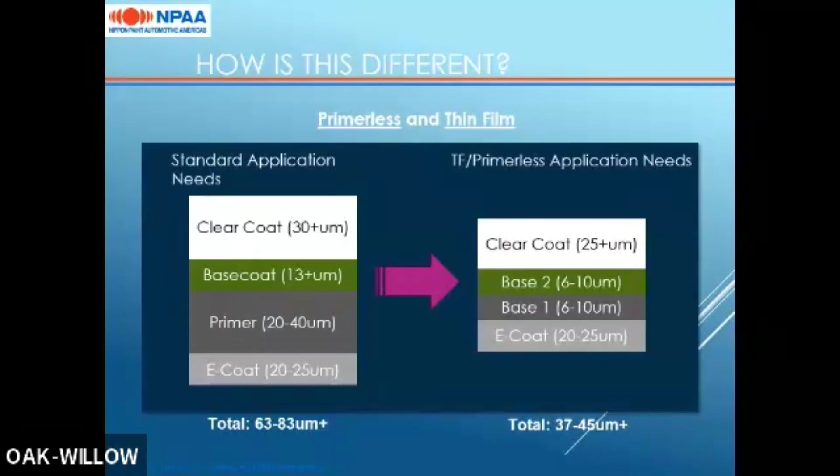There is some variation for colors that traditionally have poor hiding, such as whites, where film builds are higher. So the additional benefit there comes from the compact line design for this coating.

For standard conventional 3-coat 2-bake and traditional 3-wet processes, we still have the full bake or high temperature flash off oven between primer and base coat. Then high temperature flash off after base coat, clear coat, and then full bake after clear coat.

With this process, we are able to eliminate that first oven after primer to give us the compact process of base 1, then base 2, high temperature flash off, clear coat with full bake.

Overall, this allows for plant footprint and capital expenditure being reduced by up to 30%, depending on whether this is a new line being built or adaptation of an existing line.

So why do we use primers? Why is it a big deal that we got rid of them? Primarily, they are used for light protection, so they help block visible and UV light from degrading the E-coat layer, which helps protect the steel. This is achieved through a combination of film build and high hiding power.

As you can see in this graphic, most coatings, again, being derived of the primer, base coat, and clear coat layer, the clear coat provides protection against the UVs with UV additives and HALS. The base coats then also block some light and UV, but it's very dependent on the pigment selection. So a lot of reds, whites won't protect as well, whereas the primer helps protect against all the rest of any light penetration down to protect the E-coat entirely.

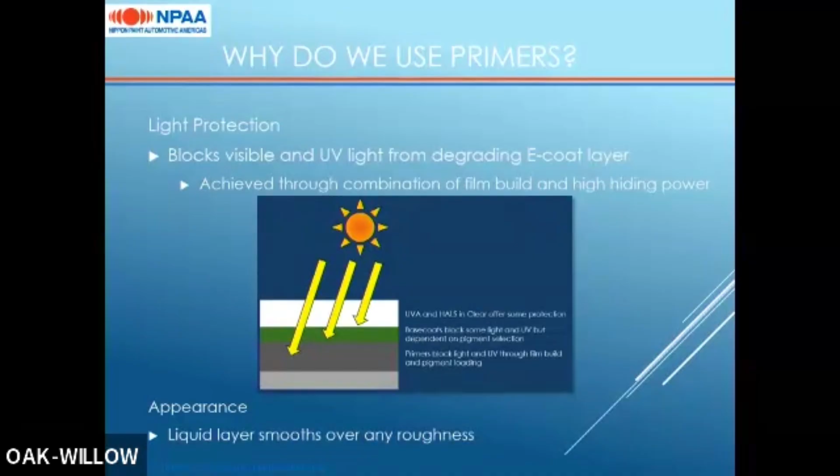Primers also help improve appearance. They cover up any defects in the E-coat layer and anything that needed to be repaired before top coat is applied.

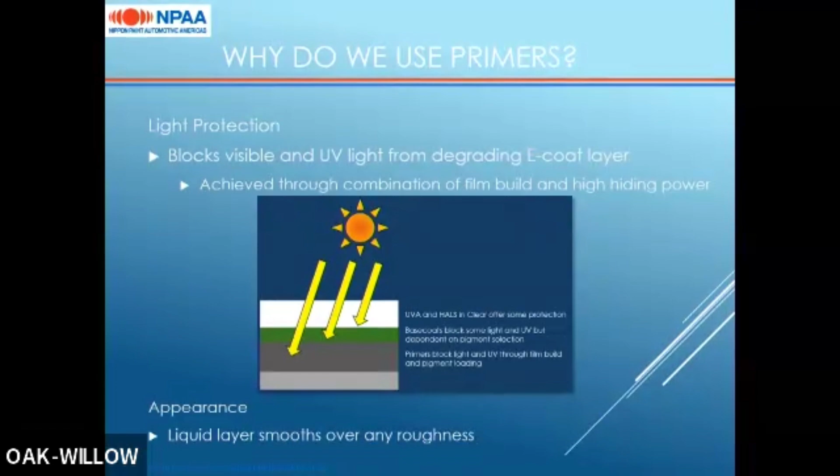Additionally, primers help with chipping resistance. They balance soft and hard properties to disperse energy. So in general, they need to be soft enough to prevent impact damage, but hard enough to prevent easy scratching.

In this infographic, we have the impact coming down and hitting your coated surface. If your film is too hard, then that energy is dispersed in the direction of energy impact, which then allows for deep defects to occur all the way down to the E-coat or steel layer.

Whereas if your film is soft, ideally optimized, that energy is then dispersed along the surface, so it just creates a small scuff, and your E-coat steel surface stays well protected.

So what are some of the benefits of eliminating the E-coat primer?

The downsides of primers, typically they require high film build. This creates risks, particularly for popping, sag. They require HFO or full bake before base coat, which is a high energy use. They also are difficult and costly to adapt for unique color positions, at least in my experience.

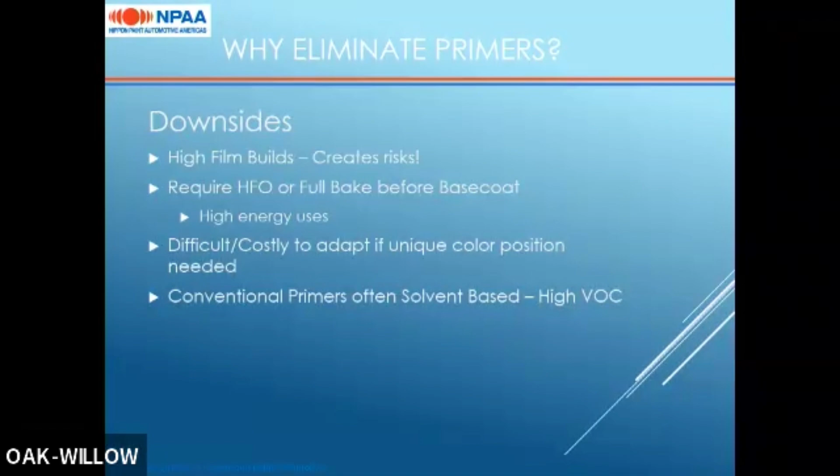Additionally, conventional primers are often solvent-based, which is high VOC. This system is water-based for both base coat layers, which helps reduce VOCs.

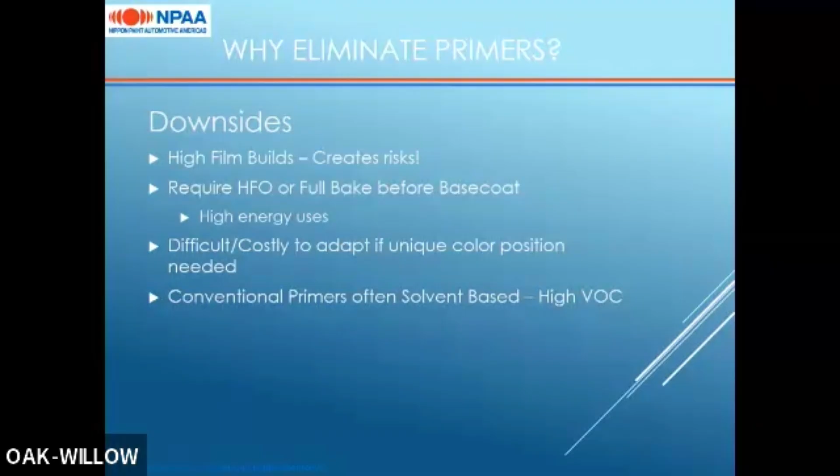So how does this technology of thin film primerless help address these needs? So for chipping, we use magnesium silicate body pigment, or talc, which is commonly used in most coatings. It is optimized for this technology to provide soft barrier to absorb impacts, and it's incorporated into both the basecoat 1 and basecoat 2 layers.

Just as an example, if you have a system without any talc, I'm sure all of us who design paint coatings know the risks, but it will allow impacts to occur that causes damage all the way down through the coating layers.

With the talc level optimized, it creates a good coating that prevents delamination below the base coat. So while there may still be coating loss, the coating loss will typically be within the top coat layer itself, so there's still adhesion to the substrate, which protects the underlying surfaces.

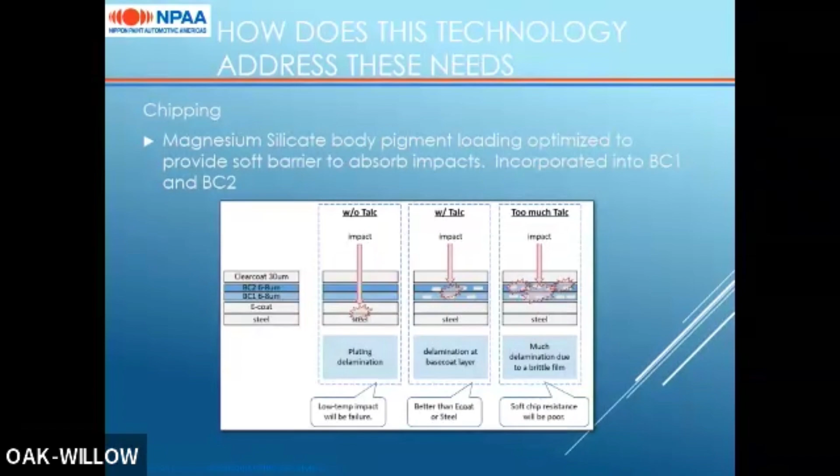If there's too much talc in your coating, then it causes delamination as well, as it breaks and interrupts the resin too much.

Additionally, these coatings are designed with a higher level of polyurethane dispersion. Again, this is pretty common in most existing coatings, but it has been optimized for this, and the type and amount are used as a replacement for more brittle resins that are typically used in a base coat, such as acrylics.

So just as an example, this is a very general version of a polyurethane made up of rigid sections and flexible sections, which then allows the coating to bend and return to its proper surface when impacts occur, so it can flexibilize.

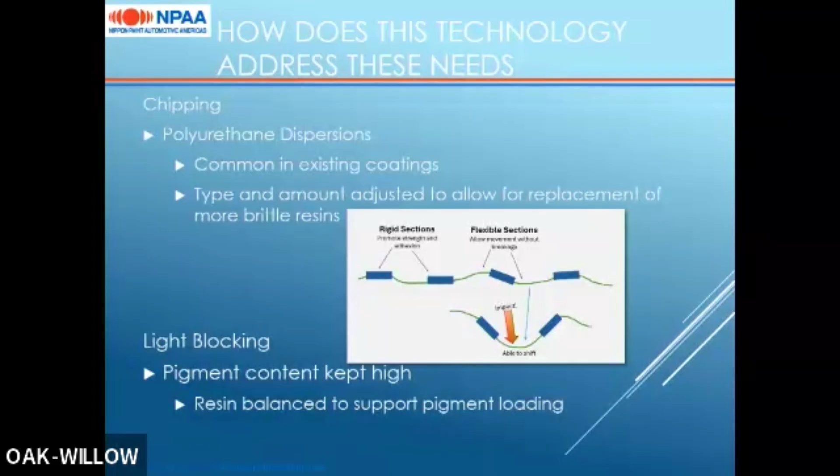Additionally, these coatings are designed to help with light blocking by ensuring that they have high pigment content, and the resins are balanced to ensure that pigment content is able to be maintained without any downsides.

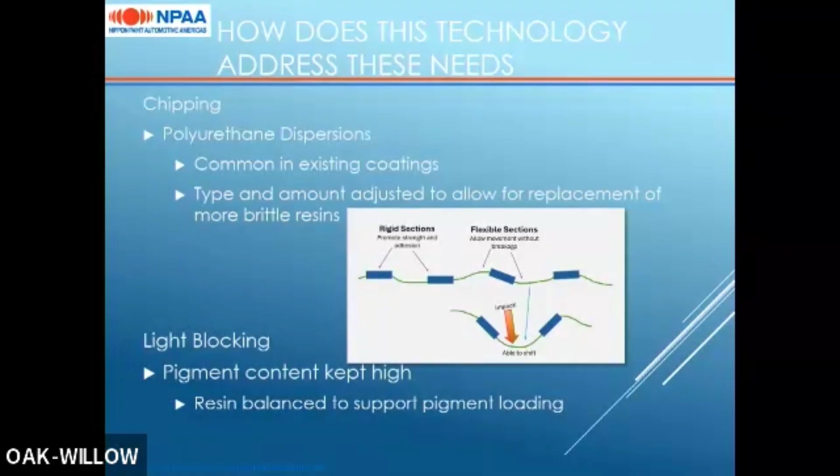Just as an example of some standard layering, for most standard colors, so not your premium colors, not whites, they use a film build of 6 to 8 microns for each base coat layer, with white and poor hiding colors typically being higher than that. For example, one of the whites that we have developed in this technology uses a base coat 1 film build of about 32 microns.

So that kind of doesn't help with the thin film portion, but because of the consolidated application process, there's still a lot of cost benefit to that. But all of them are designed to optimize the light protection.

A key benefit of this as well is that due to the dual base coat layering, unique and premium colors can be tailored by adjusting the base 1 and base 2s. Just in this little example here, we have one common base 1 in this kind of magenta color, but then we can use 2 different base coat 2s to achieve 2 different color positions. This is just an example.

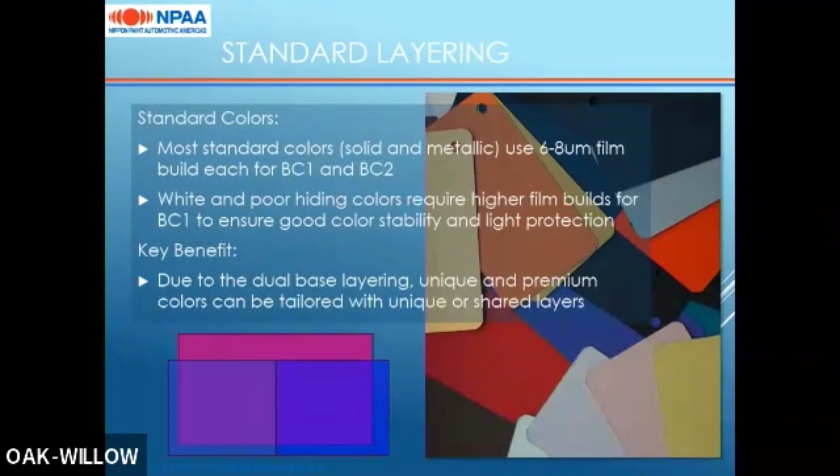Then for e-coat considerations, one of the things I've mentioned multiple times during this presentation is that most current colors or coatings are designed to help protect the e-coat. So for this, we recommend the use of specific types.

Most standard e-coats are sensitive to delamination with marginal hiding top coat systems. If the e-coat is overbaked or turns green or brown from that overbake process, it does make them more sensitive. In this example here, I just have what a typical not overbaked e-coat should look like and what a slightly overbaked e-coat should look like.

Standard e-coats can also be exposed to and are sensitive to the visible portion of the light spectrum past where most UVAs would protect.

We recommend e-coat that's been designed for compact top coat. The one that we provide is formulated to reduce oven oxidation. It's more forgiving at a low bake window, minimizes overbake e-coat yellowing, and there's space within its current design to optimize for further durability if needed.

All of these combined help reduce the risk of chemical breakdown, leading to delamination when exposed to UV or high energy visible light. So while our top coat is designed to prevent light penetration to the e-coat layer, the additional protection from the e-coat helps prevent damage to the substrate.

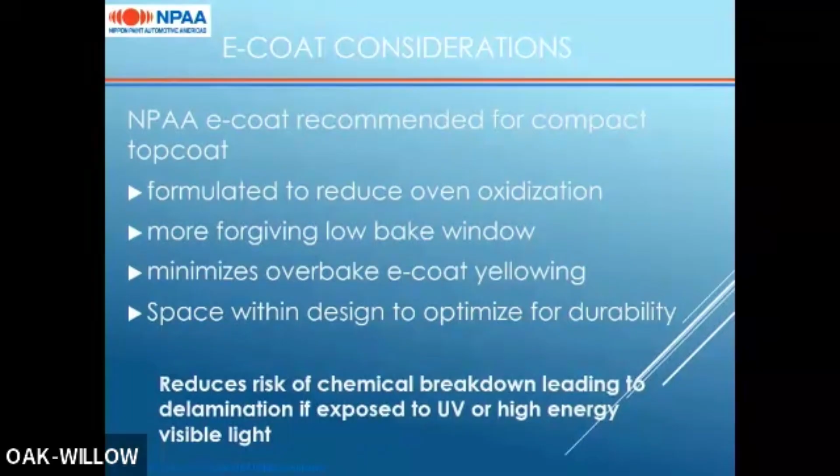Then just information on the base coats themselves. So base coat 1 is designed with high pigment concentration, again for that light protection. It has a high loading of polyurethane dispersion. It can be made with and without effect pigments, depending on what the desired finished color position is intended to be. It also is designed to be more hydrophobic, so even though it is a waterborne coating, it's designed to be hydrophobic primarily to ensure good compatibility with base 2 without them blending into each other.

Then base 2 is designed for high pigment concentration. It has also a higher PUD level than a standard coating, but lower than the base 1. Typically contains effect pigments and UV additives.

Then both of them are designed with the NV and viscosity or rheology optimized to allow for good appearance, particularly in areas where there's overdusting, so along interiors, crossover sections, and as well as to prevent sag and pop at high film build areas.

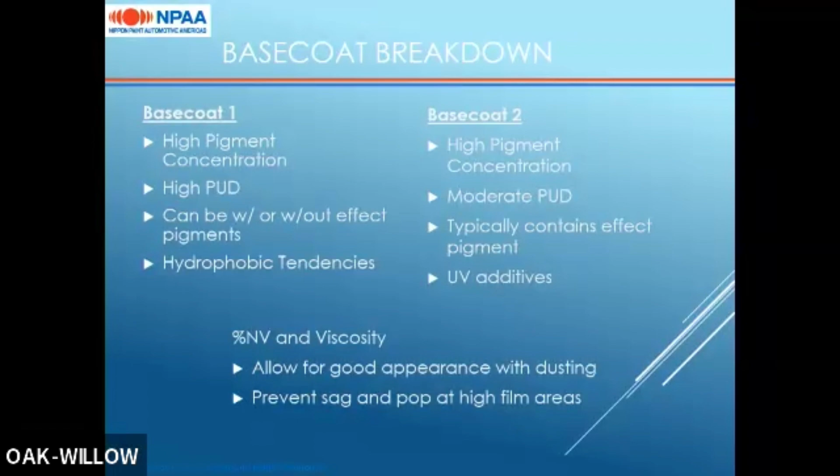And then the clear coat that we have for this system is a 2K polyurethane clear. Since this is a thin film build technology, 2K is generally the best way to go forward because it's going to offer better durability than a 1K clear coat. This improves performance with isocyanate migration. It's also higher durability than a 1K, as I said.

In the technology, in the clear coat we have, we use a similar isocyanate to the one pictured here.

This is just an example, combined with an acrylic resin that is designed for a shorter branch chain. This creates a tighter cross-link structure, which is more durable than a longer branch, which is typically used more for polishability performance.

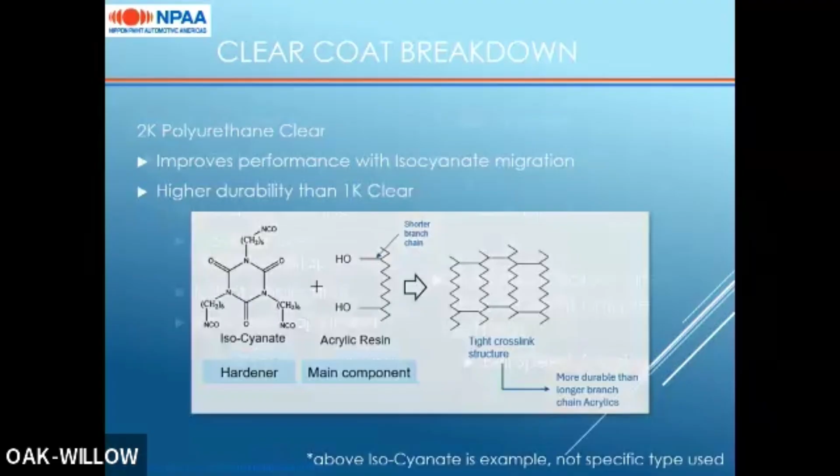So implementation considerations: film consistency, which we know we get at the customers that currently purchase the technology. This is controlled through paint properties and application settings, again optimizing that overdust and overlap area on the vehicle.

It's also very important that you use robot application. Given that this is thin film, using hand spray makes it very difficult to ensure that you're getting consistent film build across the surface. We're also able to ensure, or you need to make sure that you have good flow rates adjusted for the film build targets, with most of the colors that we currently make using a flow rate of between 90 and 140 cc's per minute.

Then for color stability, this is again controlled through application teaching and settings. Many individual colors require semi-unique settings, particularly for bell speed and shaping air.

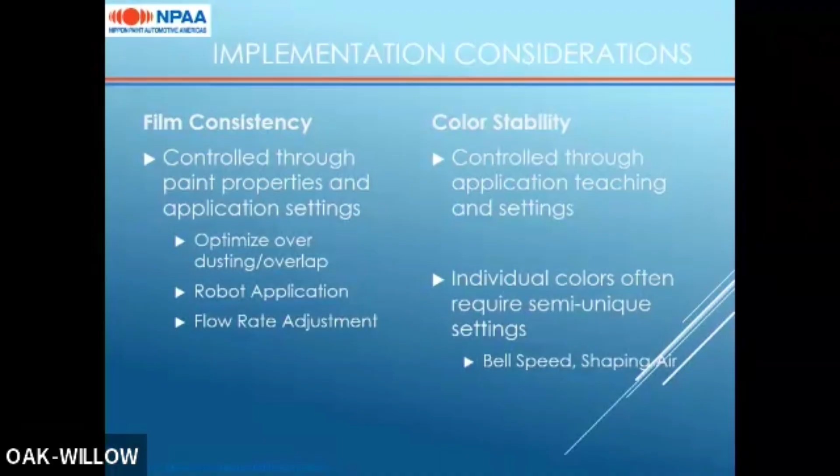Additionally, this technology is successfully used for bumpers using adhesion promoter. It's compatible with water-borne adhesion promoters designed for polypropylene-based bumpers, and 2K clear coats designed for use with water-borne basecoats. Currently, it's typically used with a low bake system of about 90 degrees total for the clear coat at current customers using AdPro and clear coat designed by us.

So how do we design these colors? We typically start with receiving the color target, whether this is an existing CSP target or a new design color. We then proceed to assess if the color could share a base coat 1 with an existing color. If yes, we develop a base coat 2 color position, and then confirm the process window is feasible. If not, we'll go back to developing the base 2 color position until that feasibility is achieved. If there is no base 1 that can be combined with it, we'll follow the same process, but designing both base 1 and base 2, ensuring the process window is feasible for both. Once complete, we proceed to film and paint performance testing and line trials.

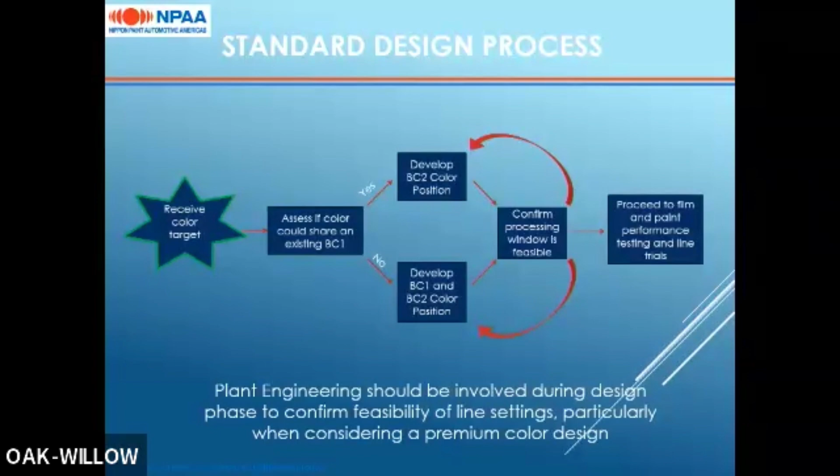Just as a quick example of our current global track record, currently we're able to successfully manufacture these materials in 4 countries, and we currently successfully run these materials in 5 countries globally.

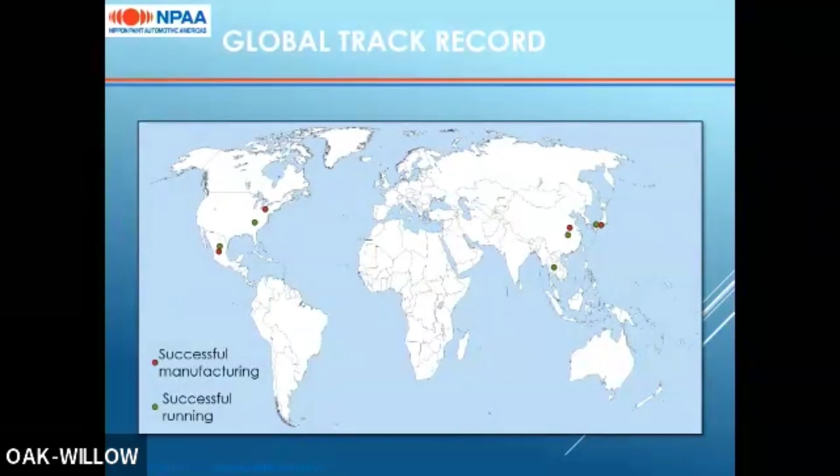I blew through that pretty quickly, but if there's any questions, thank you for your attention.

Don't go anywhere. You've got quite a few questions.

The first question is, does the overall reduced film build provide any inherent benefits? Primarily to cost and usage, so you won't be needing to use as much paint, and overall that reduces the energy for the plant because you're not baking off as much material as well.

Are there any concerns with talc usage going forward with increasing regulations due to carcinogenicity? Not currently.

How does the long-term weathering performance of the primerless system compare to conventional coating systems? Based on our lab testing, there is as good durability as conventional coatings, and these coatings have been used in the field for more than 10 years with no concerns.

At what percentage of hiding is light transmittance tested or validated? We test at the minimum target film build for each one, typically layered together at various combinations. We target to have a maximum of 1.5% light penetration through the coating.

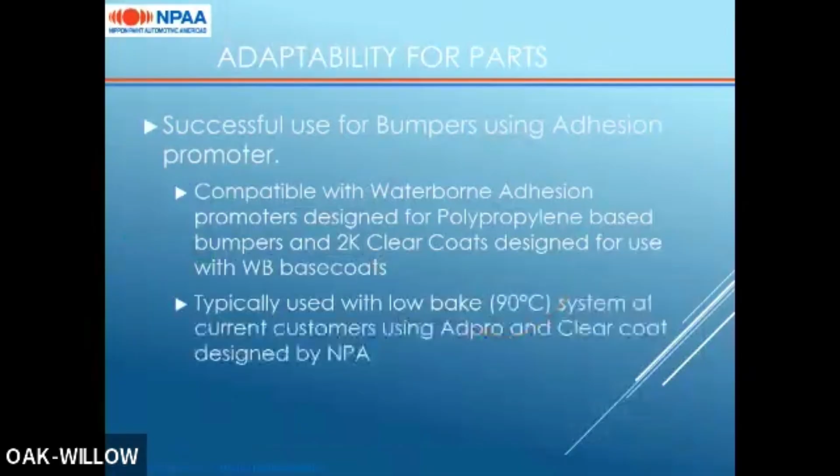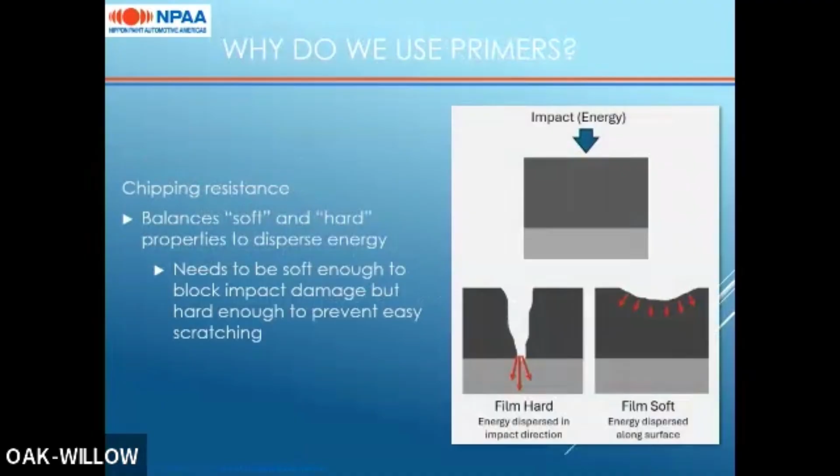How is this different than a 3-wet system from an energy savings perspective? At least for 3-wet systems that I'm familiar with, it allows for the elimination of the first bake. So at least from the presentations that I've seen today, it appears there are other materials on the market that are more similar to this, but they are higher film build.

Has Nippon Paint commercially applied the thin film primerless layering process? Yes, we have 10 plus years of commercial history.

How is the cost of color development compared to conventional? It depends on the color position and what pigmentation is needed, but probably fairly similar for the development side. Again, it varies a lot depending on what color we're talking about.

Just a couple more. How many base coat ones are needed to support a full color palette of base coat twos? If we're talking about a color palette of, say, 8 colors, probably 5.

Why is this technology limited to bumpers? I don't know that it's limited to bumpers, that's just the extent that it's been tested. If there's interest in other plastics applications, we're happy to talk to you about it.